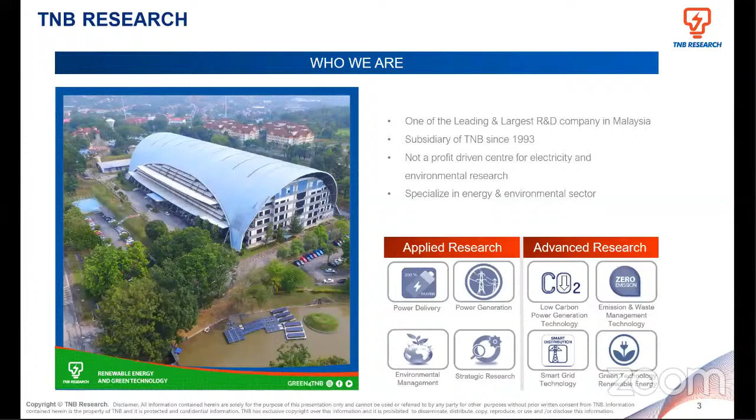All right. Okay, like I told you just now, why people are talking about sustainable energy, and also if you are from the environmental area, people are talking about climate change, carbon emission, net zero. This also has a very significant impact on the energy industry, whereby now the energy industry has to consider making changes.

The term we call this is the energy transition, and these are the factors that affect the energy transition. First, in terms of energy access and security, we have to ensure that energy is there, as well as environmental sustainability. And not only do we talk about environmental sustainability, it must also be balanced with economic development and growth. As you understand, the higher the economic growth of a country, the usage of electricity also gets higher, so the demand is there. So how are you going to balance it, as well as ensure that the price of electricity is still maintained and affordable to the people and citizens of that country. So these are what we call the energy triangle, as you can see there.

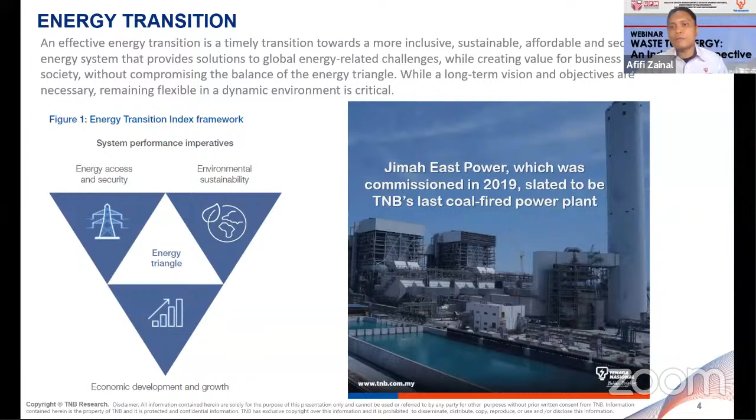If you can see, this not only happened to Petronas and TNB.

Petronas also has aspired to be a net zero company by 2050. Sarawak Energy has also already ventured into green hydrogen, towards clean energy and a more sustainable environment. So it's not only happening in TNB, all around us companies are doing the energy transition.

Why do we want to do all this energy transition? First of all, the target we are going into is in terms of the Sustainable Development Goals, which target to end poverty, to protect the planet, and for the people to enjoy peace and prosperity by 2030.

I'm not sure whether you guys are familiar or not, but there are 17 goals in the Sustainable Development Goals. The easiest way to understand these 17 goals is to divide them into 3 categories: planet, people, and prosperity.

Number 1 is no poverty, which reflects more on the prosperity aspect. So it's not only about climate change or environment, it's about everything - sustainability in terms of people, planet, and also responsibility and prosperity.

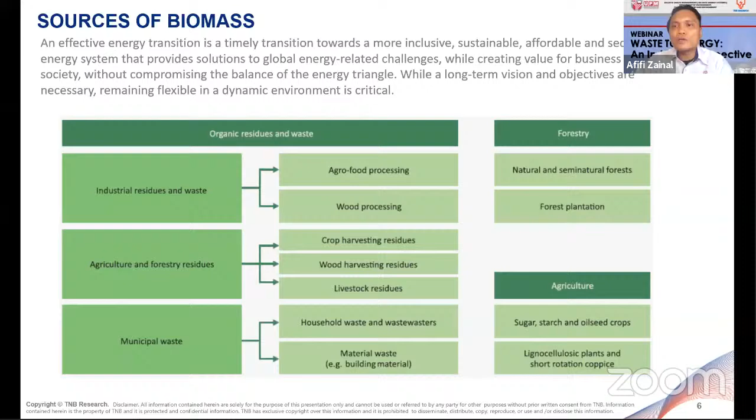I think we have to think about retrofitting or changing our type of feedstock, so we can spur bioenergy, biomass, or biogas development in Malaysia.

While I've already shared with you the types of sources, there are a few methods in terms of waste management. First, number one, the most conventional way is by having a landfill. Yes, in Malaysia we have landfills - sanitary and unsanitary landfills - but this conventional way is not so efficient.

We hardly get energy from it, except for a few landfills that already incorporate biogas. But most haven't done anything, just sanitary or unsanitary landfill. Number two, the type of method we can use to change waste into energy is through the thermochemical process, which includes incineration, gasification, and also pyrolysis.

While we have an abundance of organic material, bear in mind that most organic matter in Malaysia is considered wet, or high in moisture - around 70 or 80% moisture content. So we have to consider that the energy required to dry the organic material before it can be converted into energy through the thermochemical process requires high energy consumption. This is also an issue in choosing this route, especially when dealing with organic substances or organic waste.

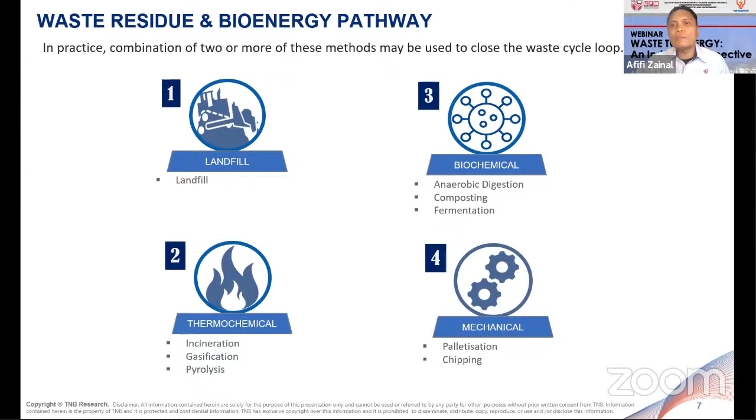Using fermentation technology to transform organic waste into hydrogen, that's one route through biochemical process. Number 4 is a mechanical process, especially for forestry waste - we can pelletize it, do some chipping, or make it into biochar through a mechanical process. That's for the methods of transforming waste or biomass into energy.

Today my focus is more on biogas technology. Maybe some of you aren't familiar with biogas - what is biogas, what is bioenergy, and what is biomass? Just to share with you, the term biogas refers to a composition of gas mainly consisting of methane gas (CH4), carbon dioxide (CO2), as well as a trace of oxygen and hydrogen sulfide. The significant element we want in the biogas composition is the methane, because it's a combustible gas that can be turned into energy or electricity.

So how are we going to do that? First, I can divide it into 4 categories. We have agricultural waste such as palm mill waste, rice husk, or sorghum, napier grass that can be converted into biogas, as well as municipal waste such as food waste, domestic waste, household waste, waste from the food and beverage industry, and from hotels and commercial establishments - that can also be converted into biogas.

This technology is more geared towards solid waste issues. We also have wastewater - domestic wastewater, industrial wastewater such as POME, and also sago mill effluent - which can also be converted into biogas. As an example, if you go through the Pantai NPE, New Pantai Expressway, you can see biogas converted from wastewater just beside the highway. And then, we can also convert animal waste like chicken manure, cow dung, and slaughterhouse waste into biogas.

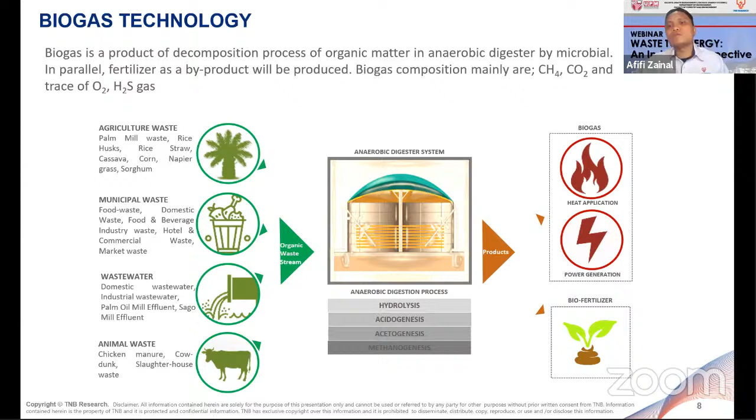Just to share with you in terms of global biogas performance, you can see it's in an inclining phase. In 2009, there was only about 8,000 megawatts of biogas installed globally, but by 2018 it already achieved nearly 17,000 megawatts. In terms of country performance, among the top 8 countries, number 1 would be Germany. But bear in mind that our neighbor Thailand has also been listed as one of the top countries for installed biogas capacity in the world.

So what's the difference between us and Thailand? There must be something we can do to improve our situation, especially in bioenergy development. However, the performance in Malaysia is also showing a good sign. In 2009, there was only 4 megawatts of biogas installed in Malaysia, whereas in 2017 it already reached 81, and by 2018 about 90 megawatts. I believe now it's much higher than that.

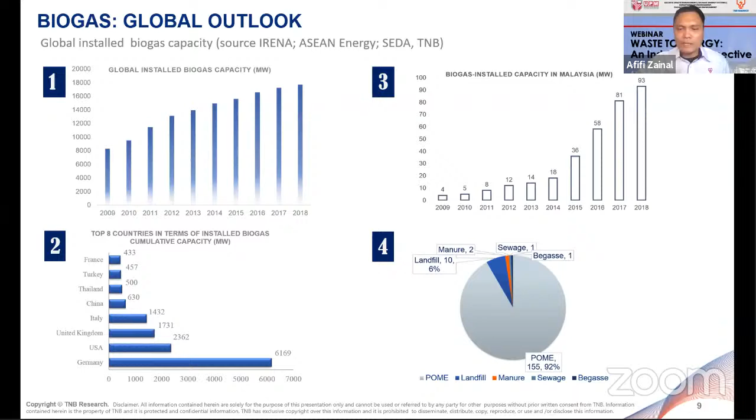Just to share with you how we can do that in terms of biogas feedstock. POME is number 1 because it contains high organic load. Organic load reflects how much biogas can be produced from that feedstock.

For POME, it's about 60,000 to 100,000 milligrams per liter of COD, whereas for food waste, it contains 250,000 up to 450,000 milligrams per liter of COD. This is not a global result, but actually using numbers from our own research for Malaysian types of food waste, about 250 up to 450,000 milligrams per liter of COD.

It was also the second largest CO2 emitter, based on the UNFCCC report 2020. Apart from that, we also have sewage plants. You can see my picture with my intern and colleagues at Pantai STP. Usually the organic load contains around 7,000 to 15,000 milligrams per liter of COD.

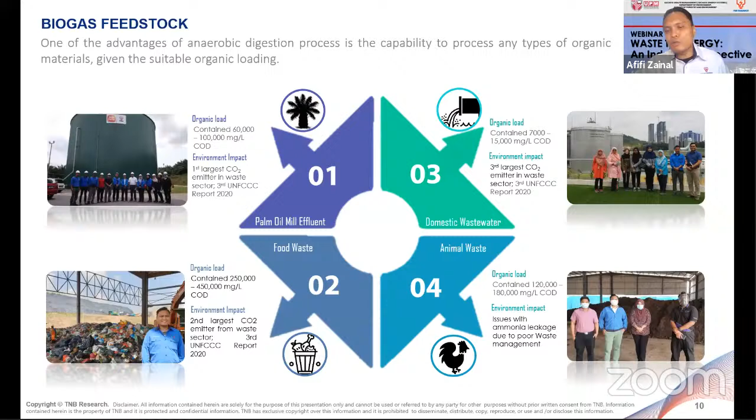Apart from that, we can also use animal waste, which also contains high organic load, 120 to 180,000 milligrams per liter of COD. Just to share with you our innovation in TNB research, I just finished the project for co-digestion of biogas production, which means we mix 2 types of feedstocks for biogas production. In this case, we use food waste, municipal solid waste, especially food waste, as well as animal waste, chicken manure.

Based on that, when we chart for sustainable development goals, we saw that at least 8 out of 17 SDGs can be complied with if this project can be turned into commercial development.

First, number 1, it contributes towards SDG number 1, no poverty, which creates job opportunities for all levels of workers, high skill or low skill. Why? Because we need biochemical engineers, we need chemists, and at the same time we need municipality workers to collect and segregate waste, especially food waste.

Part of that, we also contribute in terms of SDG 2, zero hunger, which provides reduced cost of fertilizer through biofertilizer produced as a byproduct from the biogas process.

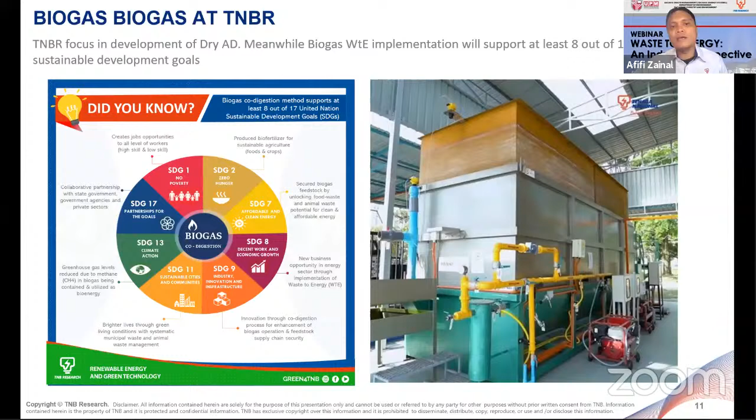This project cannot be done just by having TNB alone. Again, we have to collaborate with entities such as Solid Waste Corporation, KPKT, as well as the Department of Veterinary, to ensure this project is a success. Of course, in any technology or project, there are challenges and constraints for it to be developed.

First, number one, in terms of stakeholders, especially when I've been asked - do you want to solve waste management issues or do you want to produce renewable energy? So there's an overlapping issue, especially regarding stakeholders, whether it's KETSA, Kementerian Tenaga, or KPKT, Kementerian Perumahan, or even MOSTI, especially in technology development.

Overlapping issues also consist of federal versus state, especially in terms of site selection, whether it should be decided by federal or state government. Also in terms of policy, in states such as Wilayah Persekutuan, Kedah, as well as Johor, it was under Act 672, whereas for states such as Selangor, it was under Local Government Act 171. So there are different acts for the similar issue.

In terms of society, we have to start educating and creating awareness among Malaysians to practice waste separation. I believe UPM has started that, and this contributes to a high impact in terms of the Green University Index for UPM. Apart from that, we have to implement and enforce waste segregation, because this act has already been there since 2015, but the enforcement is quite low.

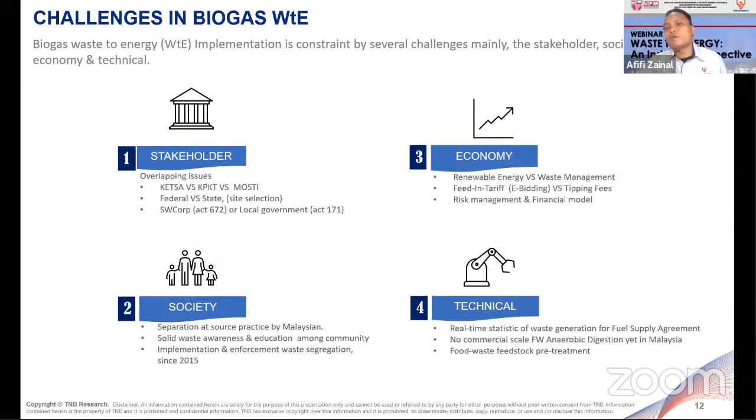Just to share with you how I see the future of biogas, especially waste-to-energy, in terms of a circular economy model, and to transform biogas into advanced biorefinery.

Number one, we have to start segregating solid waste, especially the organic waste, and let the truck compactor take it for collection, and this segregated organic waste is converted through anaerobic digestion technology. But that's not enough.

What we can do then is upgrade the biogas into renewable natural gas by upgrading the methane content in the biogas from 50% up to 97%. So it becomes comparable to natural gas, and that natural gas can be injected into the national gas grid, which can be used as fuel as well as for electricity.

Not only that, if we focus more on the anaerobic digestion process, we can expand the AD process into two stages, the first stage and second stage, whereby in the first stage we can produce biohydrogen.

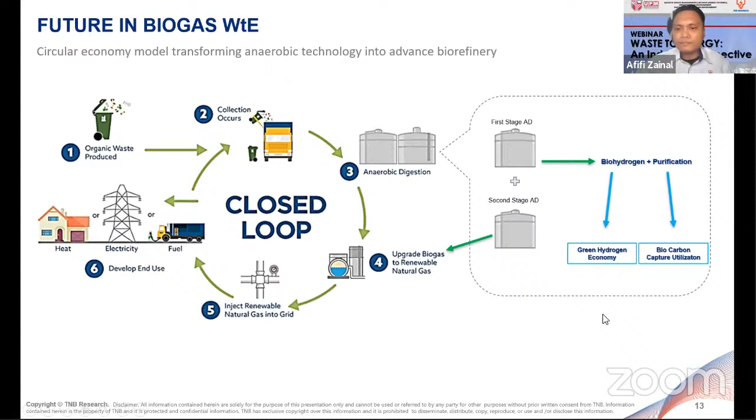I think that's all from me. Maybe Dr. Irina can share a video on biogas to the audience.

Let me try first, because sometimes what happens with my computer is people cannot hear the sound. Let's try first. Okay, just give me one moment. I hope I follow the time schedule.

That's okay. I think it's a very interesting thing actually, because we see a lot of familiar stuff, but it is more tailored towards the industry. Sometimes you don't know the relationship - who would have thought that for food waste, TNB would work on food waste? That is something very interesting.

I'm trying still. Just one minute. So yeah, this is the limitation of online webinars, I guess.

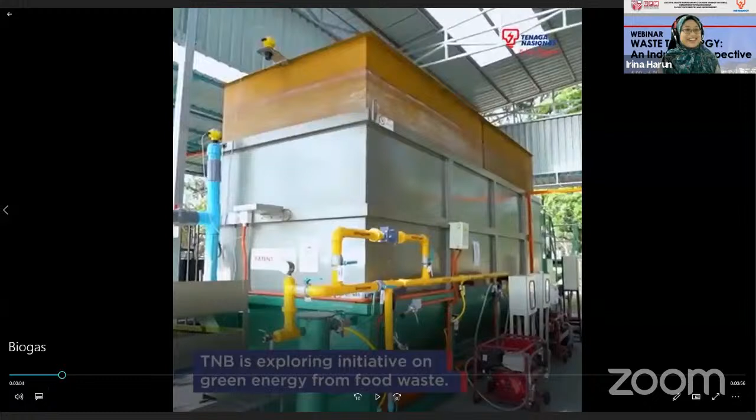Okay, can you hear the sound? Maybe not. No sound, right? There's no sound. It's okay, I can explain it without sound. Okay, alright, just one, I'll try. The background sound - yeah, you can be the background. It's okay, you can play it even without sound.

Just because I want to share with the students especially, and what we have done. Okay, sure. I'll just share this one, I guess. Oh my God.

I look forward to a question. Yeah? There are a number of questions actually. Oh okay, maybe while you're trying, maybe we can. Yeah, okay, first question - even though there is an option for these biomass sources, are the industries cooperating, or is it hard to get them involved?

Okay, even though there is an option for using these different types of biomass, are the industries cooperating, or is it hard to get them involved?

Yep, that was one of the challenges, especially when we already have a matured industry, especially the palm industry. So everyone is going for palm oil mill effluent and they stop trying to develop new technology, especially in handling the municipal solid waste, the organic fraction of municipal solid waste.

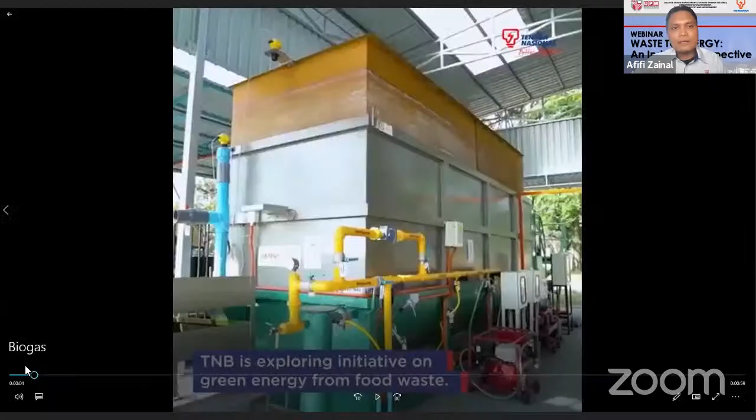However, if you see it in a different perspective, countries like European countries, Japan, China, or even our neighboring countries like Singapore and Australia, they don't have palm oil mill effluent, and yet they still produce bioenergy, especially biogas from organic waste. So their main contribution comes from seeing it in a different perspective.

I hear an echo. Okay, there's an echo. Alright, so such as Germany, they focus more on bio waste, which includes food waste as well as animal waste and agro waste. So they don't have palm oil mill effluent.

So if you see that as a way forward, actually we open up a new market for a new startup company to invest and to gain more, and broaden the market for bioenergy. So that's how I see it, and how we can gain opportunity from that area.

Again, we also have to ensure that not only the industry but the graduates that come from the university must be equipped enough, or have the knowledge and information on this kind of technology. So once they go into the career pathway, the industry doesn't have to do so much on capacity building, especially on biogas technology, since at the fundamental level they already know how to deal with it. So that will also be helpful for the industry.

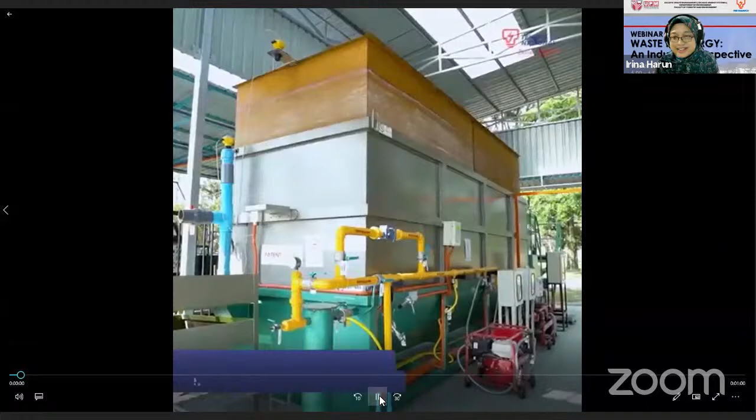Okay, let's try once more with the video. So once they... Can you see the sound? Yeah, I can hear the sound.

Industry. Okay, cool. So this waste segregation has been done just to check whether there is a spoon. See, the aluminum can was not inside there. But throughout the time, I guess when people start to create the awareness on waste separation, it will be better.

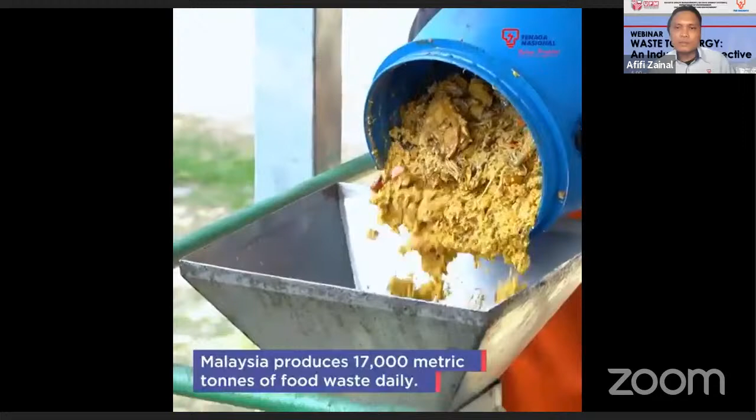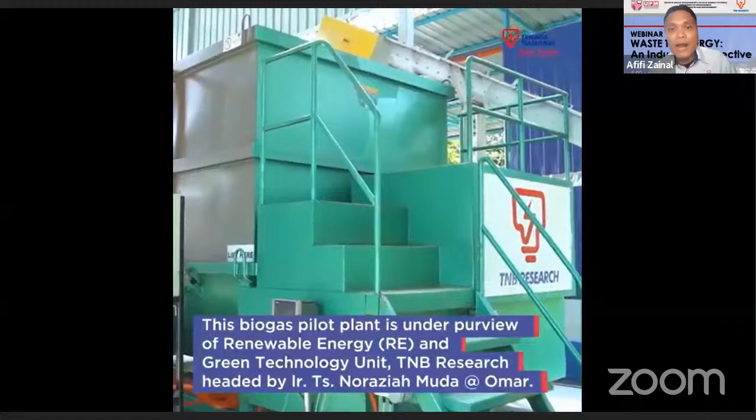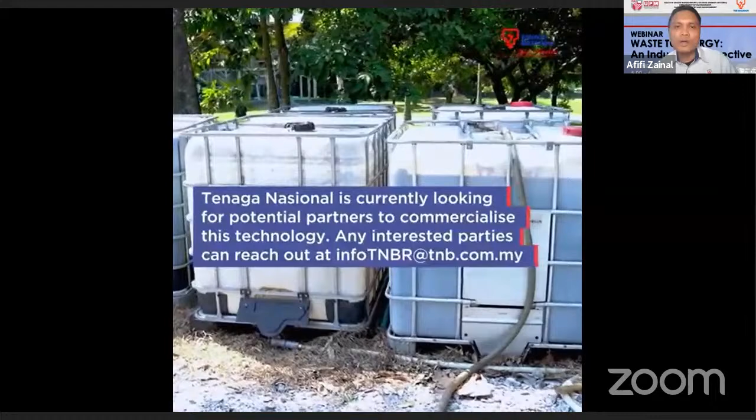So these are food waste that have been dumped and transferred into the AD system. This is the AD system, the dry AD technology. You can see that the biogas is filling up, and these are the digestate, the liquid fertilizer that contains high nutrients, which we've stored and used to fertilize the garden. And these are once the biogas has been used for electricity, it's going down.

So, just a short video, and I guess we'll get back right back to it because there are a number of questions as well.

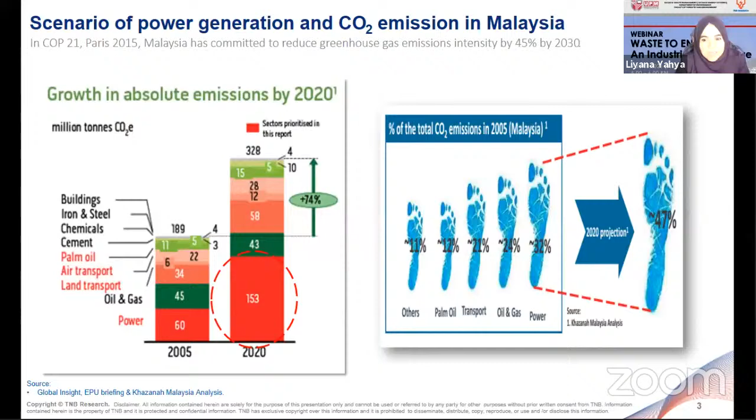Being one of the energy industry players, and also one of the largest CO2 emitters, I believe that we could contribute towards achieving this national target. All right, now let us see what approaches are available in reducing or mitigating CO2 emissions.

There are actually several approaches available, as you can see here. Some of them have been applied, some are still under consideration, and some are still under R&D. But from this figure, none of them is superior - they are more complementary to one another. So you guys are the young generation nowadays, right?

Most of you must have a Twitter account. If you're aware, earlier this year the Tesla CEO announced on his Twitter that he is donating around 100 million USD as a prize for the best technology that can capture carbon dioxide. I believe he was brave enough to announce this, because he actually knows that there is no single technology or approach that can solely solve this issue. So of course, each and every technology does have its pros and cons.

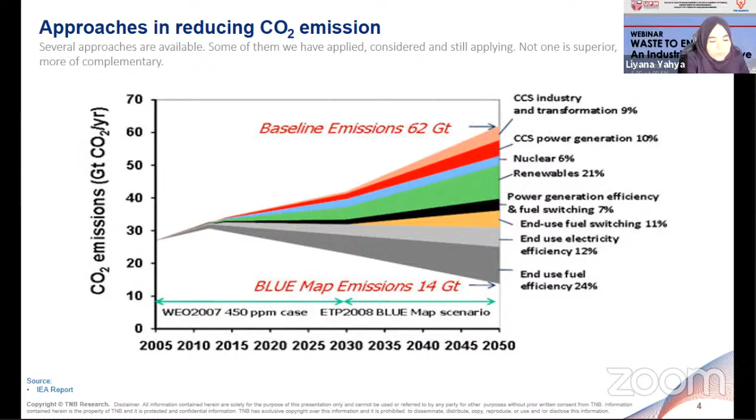All right, so let us now move to the emergence of circular economy and sustainable development. If we look back 5 or 10 years, researchers, engineers, and even academicians were just eager in technology development without really caring about circular economy and sustainable development. However, in recent years, we see that people are more aware of the importance of these two aspects.

So what I actually mean by these two terms - there are many interpretations, you can even Google it, but let me simplify this. Sustainable development is actually the development that meets present needs without compromising the ability of future generations to meet their needs. In other words, in developing a technology, we must also balance or mitigate its possible impact on three basic elements, which are social, economic, and environment.

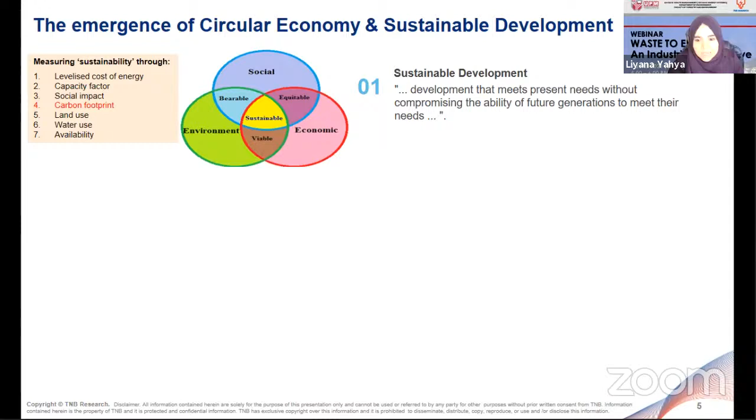In fact, there are many ways to measure sustainability, as I've put in the left corner here. And of course, one of them is by the measurement of its carbon footprint.

So let us now see the definition of circular economy. This circular economy is a subset of sustainable development, whereby it aims at eliminating waste by utilizing waste or using renewable resources, like you saw in Afifi's presentation just now - utilizing food waste and converting it into something valuable, which for us is energy production.

Talking about RE, there are many sources such as wind, hydro, municipal waste, and others, whereby we can convert this into energy, basically creating a closed loop system where we can minimize the creation of waste, pollution, and also carbon emission.

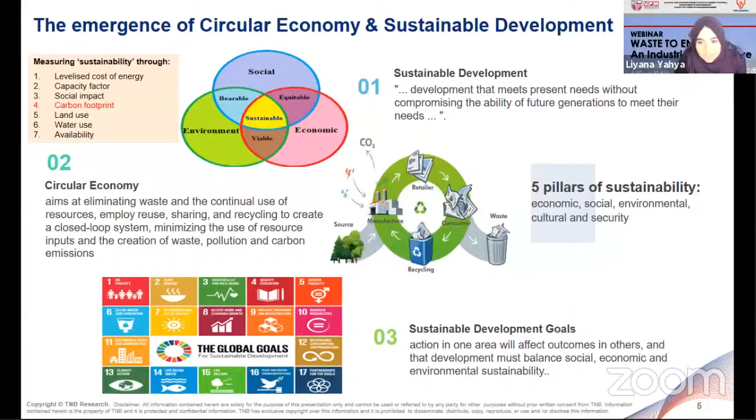All right, so now I move into the details of carbon capture, utilization, and storage technologies. There are a few alternatives on this, known in short form as CCUS technology, where there are a few technologies available with different mechanisms and levels of maturity, which include pre-combustion, during-combustion, and post-combustion approaches.

We know that in Malaysia, currently, coal is still one of the biggest sources for energy generation due to its attractive price and higher output efficiency. But we know that the energy transition now, not only in Malaysia but throughout the world, basically involves the transition from fossil fuel towards renewable energy.

But of course, that's why we call it a transition process, because it requires awareness, the maturity of technology, and also involvement from government, the legal perspective, and so on.

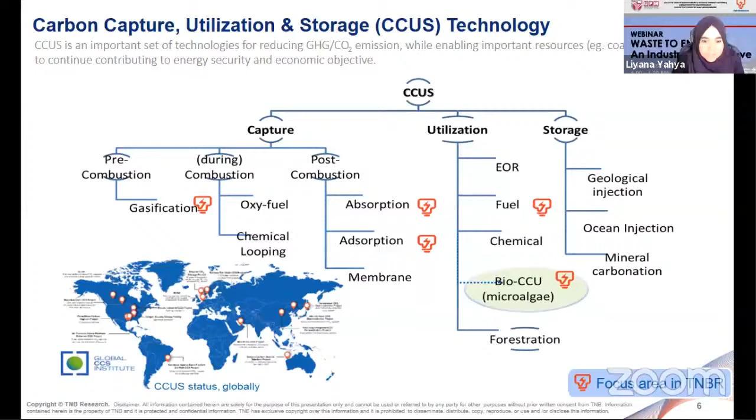All right, so talking about CCUS - a few years back, people were talking only about carbon capture and storage, CCS, without stressing the utilization part. But we know that recently there is emerging technology on CCU rather than CCS storage.

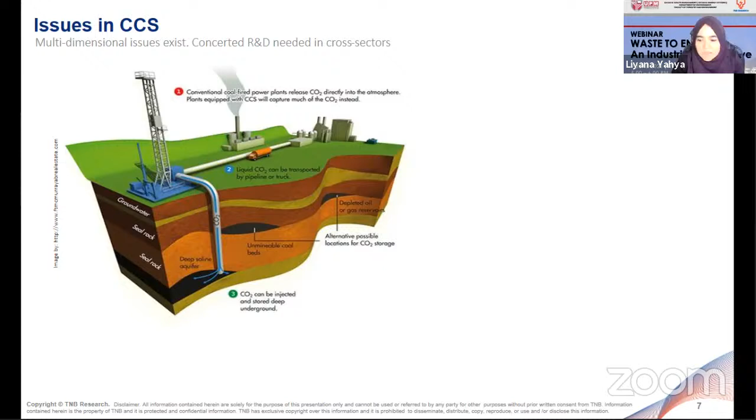This is basically due to a multi-dimensional issue which exists in carbon capture and storage, whereby each sector requires R&D and also higher cost. For example, talking about the capturing sector, it requires higher cost and is energy intensive for compressing technology to be implemented.

However, currently in Malaysia, there is, I would say, no incentive available on the CO2 mitigation approach. So what normally happens in Malaysia is some industries will compress their CO2 gases and sell it to other industries, where the other industries will use this raw material to produce other products.

So if the industry were to implement carbon capture and storage, after capturing, they would definitely need to transport this compressed CO2 to another suitable place, which would not only incur additional cost to the industry, but they would also need to deal with multiple authorities to transport it to other states or even other countries.

Last but not least, there's another big issue, which is the storage part. So in Malaysia, do we really have available space or land to store the CO2? I don't think so. For the current situation, we don't have enough space or land to store this compressed CO2 underneath our land.

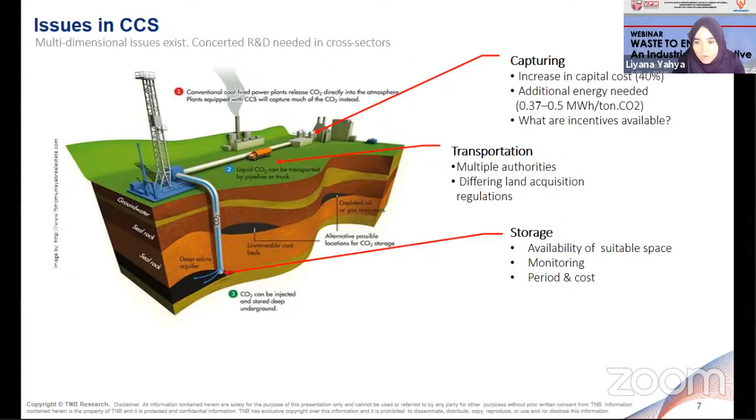Not only that, we also need to think about the monitoring aspect in the short term and also long term, which definitely requires another high maintenance cost.

And again, talking about sustainability from my previous slide - is this approach safe? Currently, I would say there is no concrete evidence on the potential impacts to our environment, as the CO2 is pressurized and injected underneath the land surface. So could this become a possible reason for earthquake or tsunami? Something for us to think about.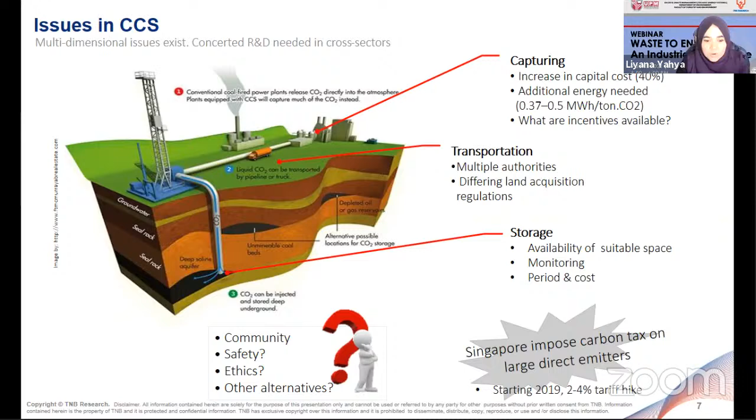And even though, as I said before, there is no regulation on CO2 in Malaysia, we need to prepare ourselves, as our neighboring country Singapore has already imposed a carbon tax on large direct emitters starting in 2019. So we could be next, because we are just neighboring countries. So this is basically our motivation to become a driver in the technology if there is future regulation on CO2 for the industry.

So now we will be discussing the main topic today, which is biological carbon capture and utilization.

We at TNB Research have started this biological carbon capture utilization project since 2011, with the aim to reduce CO2 emissions from the energy industry and also promote circular economy through its downstream products. So what does it actually mean by bio-CCU? Bio-CCU is actually the CO2 utilization by microalgae, and it is considered to be a sustainable alternative approach, as this CO2 gas is naturally sequestered or fixed by the algae, and then converted into oxygen and organic matter through their photosynthesis process.

So why bio-CCU? What are its advantages? Well, like I said before, this approach is basically to unlock the potential of carbon utilization as an alternative to carbon storage, which I would say is not really viable in Malaysia.

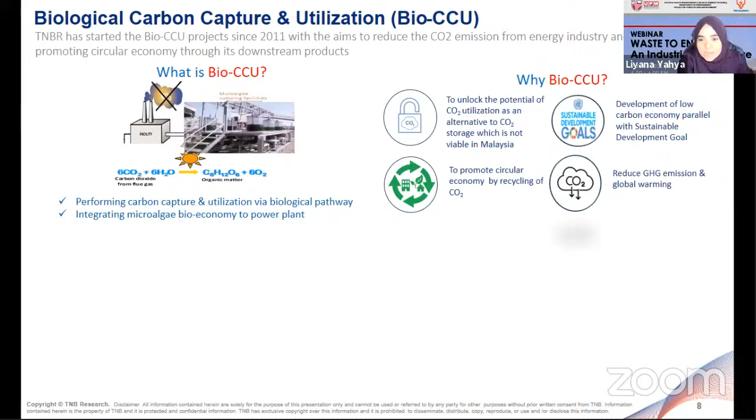The second reason is to promote circular economy by recycling or utilizing the CO2 into biomass, which can be further converted into valuable downstream products, including biofuel, nutraceutical, aquaculture food, fertilizer, and so on. The other two reasons, which relate to one another, are development of a low carbon economy and mitigation of greenhouse gas emissions, which would then contribute to the sustainable development goals.

Talking about the bio-CCU project in TNB Research, we are the first biological carbon capture. We have the pilot plant facility in Malaysia, which was tested under real life coal-fired power plant conditions. You can see our pilot scale photobioreactor there, where Dr. Irina was one of our team back in 2015, if I'm not mistaken. This pilot plant is being tested at one of our coal-fired power plants, TNB Sultan Azlan Shah Power Station in Perak, in Seri Manjung, Perak.

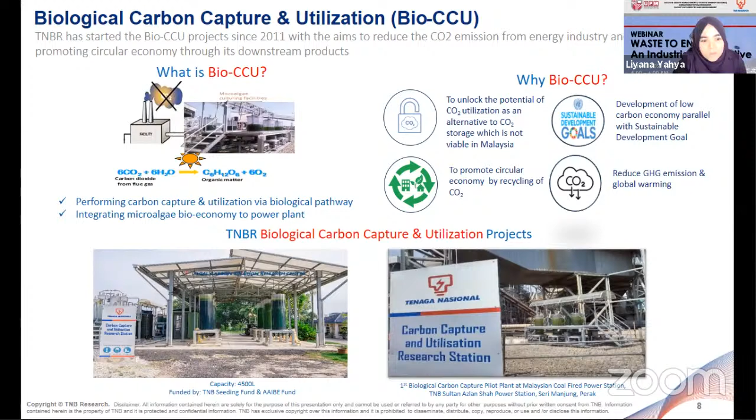Now talking about the research focus in this biological carbon capture and utilization, intensive research has been carried out to develop a feasible and efficient system for CO2 reduction or mitigation in industrial scale, and utilization of CO2 by microalgae. But I would say the efficiency of this biological CO2 utilization really depends on a few parameters or aspects.

So in TNBR we are looking at a few angles, including species, culturing, the bioreactor itself, harvesting, and also its downstream potential. In terms of species, we already studied indigenous species, whereby the species we use in our pilot system are actually isolated from the vicinity of the power plant seawater itself. We have also tested both mono, which is single species, and consortium species, and we found out that the consortium species gives a better result. Not to forget, in terms of phototrophic and also mixotrophic species.

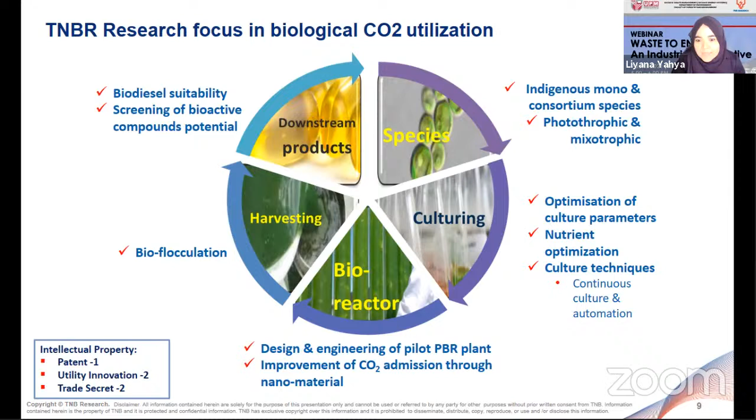With nearly 10 years experience, Alhamdulillah, we have several intellectual properties in this area, which include patents, utility innovation, and also some trade secrets.

So like I said just now, this BioCCU approach, one of the aspects that people are looking into is the attractive market of its downstream product potential. Talking about circular economy, this BioCCU can definitely promote revenue or returns out of its biomass.

This algae biomass actually has a very broad or wide spectrum in terms of its downstream application. As you can see here, the biomass can be applied from a very simple or direct application, such as fertilizer, up to a complex product like pharmaceutical or nutraceutical product. Of course, the price will definitely differ based on its pre-treatment complexity and also stringent safety and health requirements.

For example, pharmaceutical and nutraceutical products have to undergo toxicity and clinical trials, right, like the vaccine nowadays that we are looking forward to for COVID-19. So the price really depends on the treatment or any health requirement that is required. Of course, the nutraceutical product, for example, would definitely have higher value, but with just a small amount.

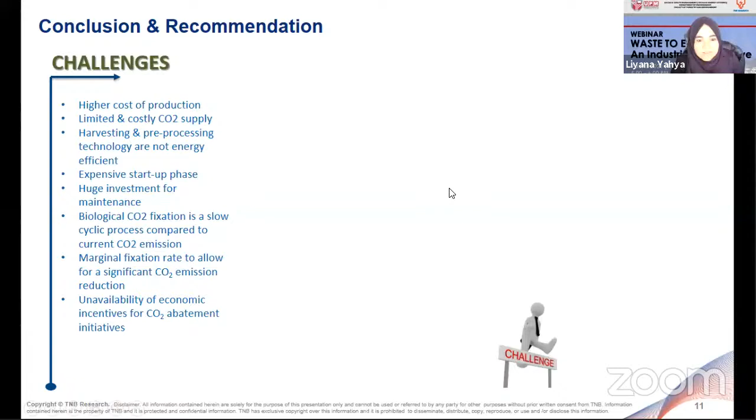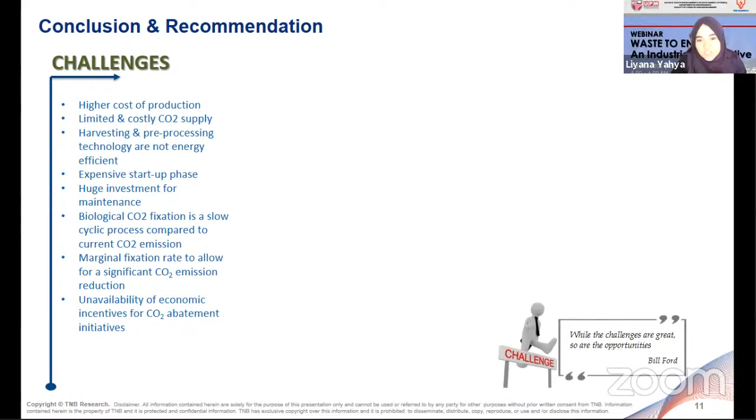But we know there's a quote saying that while the challenges are great, so are the opportunities. So actually, it is up to us how we can change these challenges into opportunities.

As discussed before, there is actually no technology that is superior; they are more complementary. Thus, I would say this BioCCU technology should be integrated with other carbon capture technology, for example absorption using amine base, which is proven to capture more than 90% of CO2.

However, that method does have issues with CO2 utilization. So if we can integrate these two technologies, it will be balanced between one another.

Being one of the Asian countries, we have a well-conducive environment that is really suitable for microalgae growth throughout the year. If we compare to European countries where they have four seasons, it's really hard for them to grow algae at certain months or years. So we need to take this opportunity of being in an Asian country to grow microalgae for the BioCCU approach.

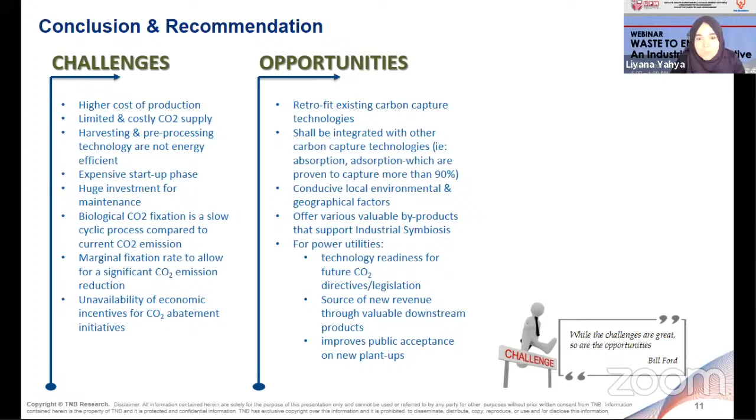So lastly, on the way forward, there should be more R&D study conducted to improve or enhance the performance of this biological fixation. The development of a pilot biorefinery plant could also help in achieving economic viability and sustainability of this technology.

For each industry, we need to identify what are really suitable byproducts relevant for that industry. For example, for TNB, what are actually the byproducts that can relate or be relevant to our business.

And of course, all of this could not be possible without strong collaboration and networking from other industries, organizations, and academicians in supporting the technology or the technical background behind it. So I guess that's all from me.

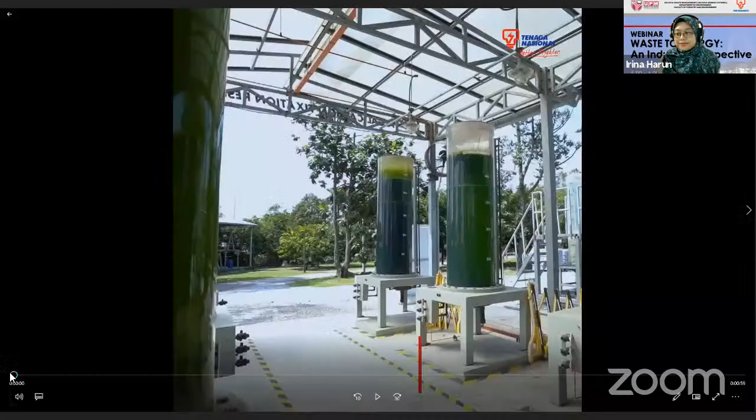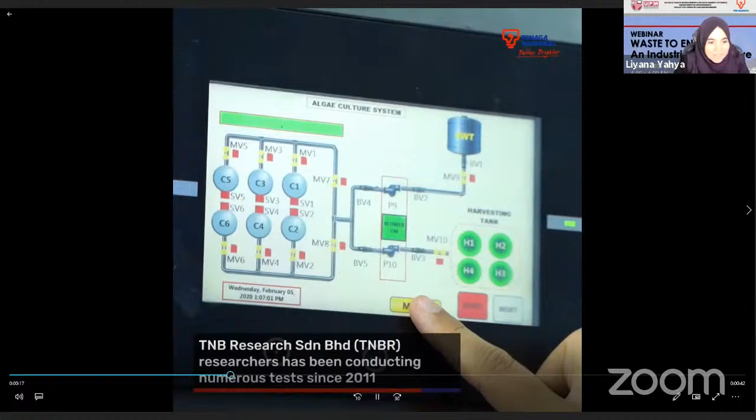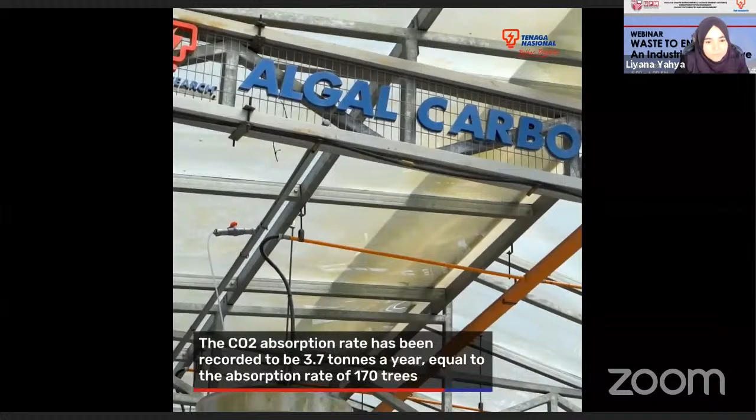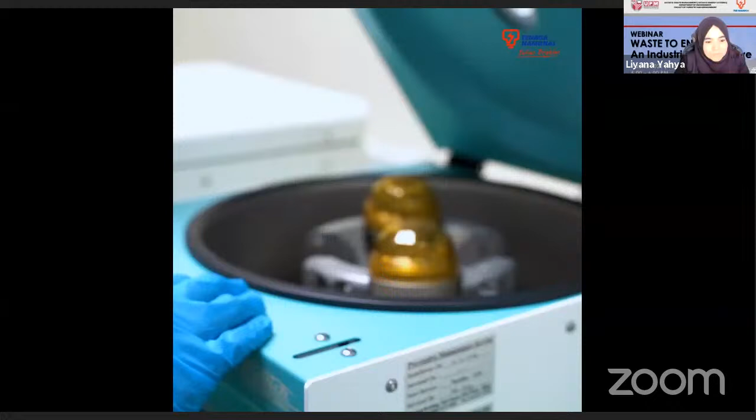So this is our pilot plant that we've conducted at TNB Janamanjung and also at TNB Research.